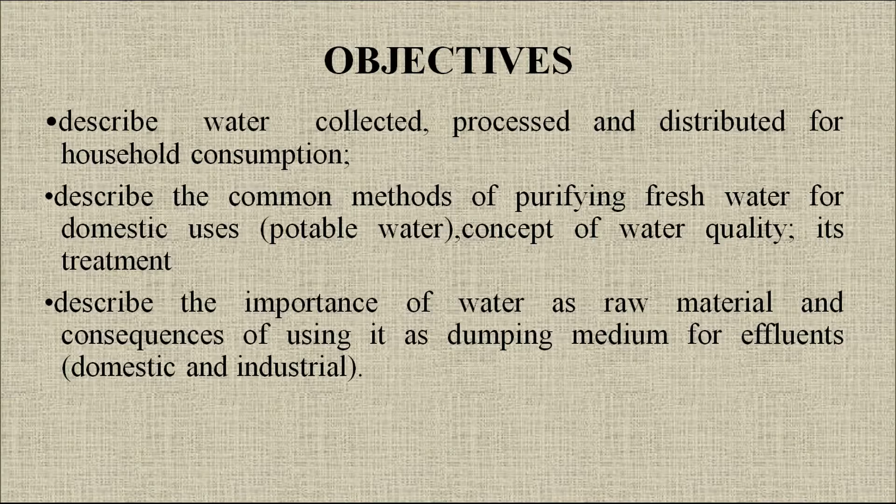The objectives are: describe how water is collected, processed and distributed for household consumption; describe the common methods of purifying fresh water for domestic uses; concept of water quality and its treatment. Lastly, describe the importance of water as a raw material and the consequences of using it as a dumping medium for effluents, both domestic and industrial. So let us define what is fresh water.

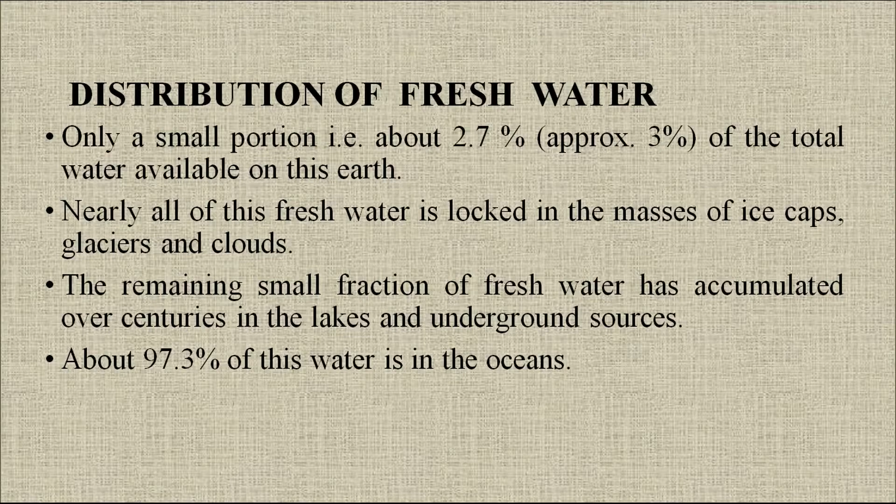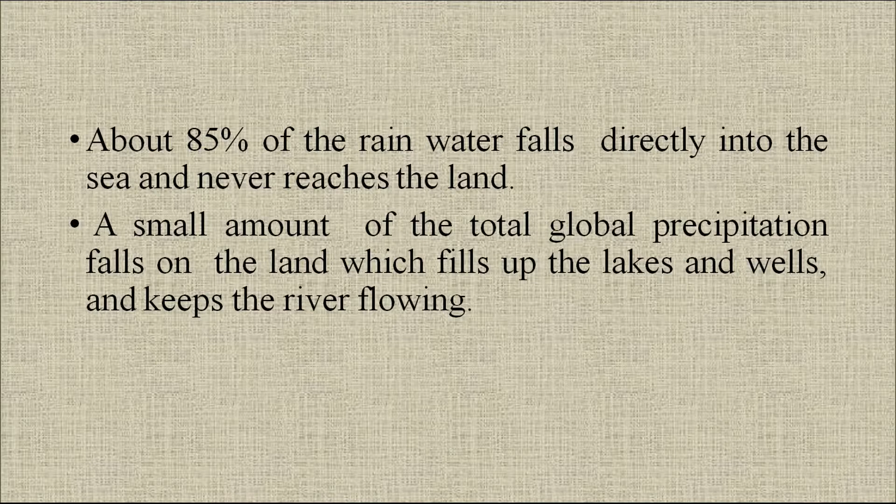Fresh water is water that has no salt and that we can drink. Distribution of fresh water: only a small portion, about 2.7% of the total water, is available on this earth. Nearly all of this fresh water is locked in the masses of ice caps, glaciers and clouds. The remaining small fraction has accumulated over centuries in lakes and underground sources. About 97.3% of this water is in the oceans. About 85% of the rainwater falls directly into the sea and never reaches the land. A small amount of the total global precipitation falls on the land, which fills up the lakes and wells and keeps the rivers flowing.

Out of the 2.7% fresh water, 2.14% lies frozen in the polar regions. Thus, all the water in the lakes and rivers, all the moisture in the atmosphere, soil, vegetation and underground water amounts to about 0.5% of the total. Of this 0.5%, more than 98% is in the form of groundwater, half of which lies more than 1000 meters below the surface, and thus only 0.1% is in the rivers.

Water resource distribution of India: the annual rainfall over India is 1170 mm, which is more than anywhere else in the world for a country of comparable size. From precipitation alone, India receives 4000 billion cubic meters including snowfall. Of this, three-fourths occurs only during the monsoon. A good part of this water is lost through evaporation and plant transpiration, leaving only half of it on the land for use.

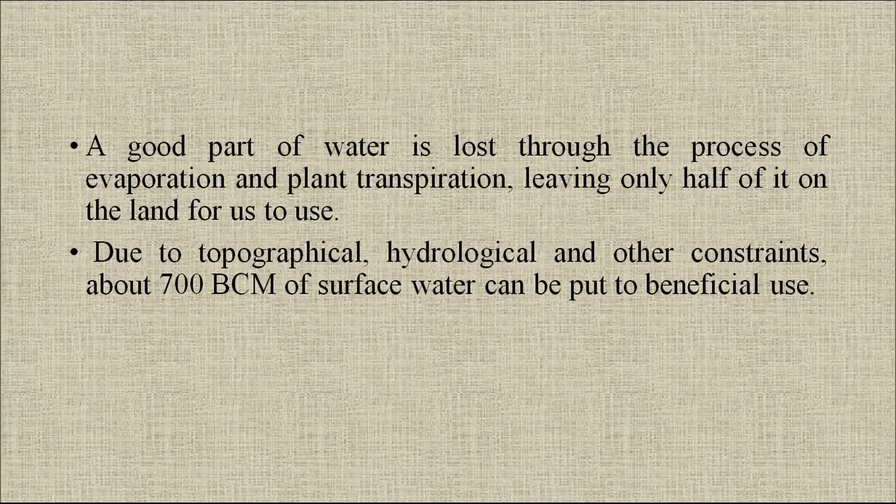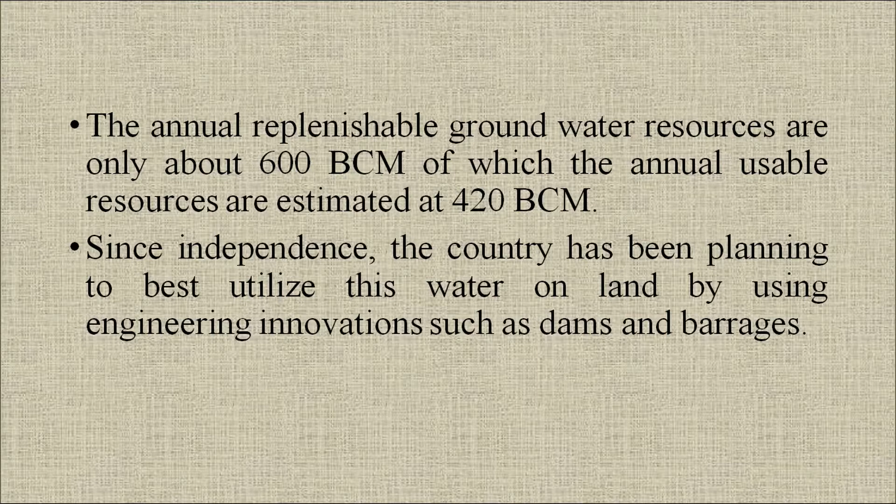Due to topographical, hydrological and other constraints, about 700 BCM of surface water can be put to beneficial use. The annual replenishable groundwater resources are only about 600 billion cubic meters, of which the annual usable resources are estimated at 420 BCM. Since independence, the country has been planning to best utilize this water on land using engineering innovations such as dams and barrages.

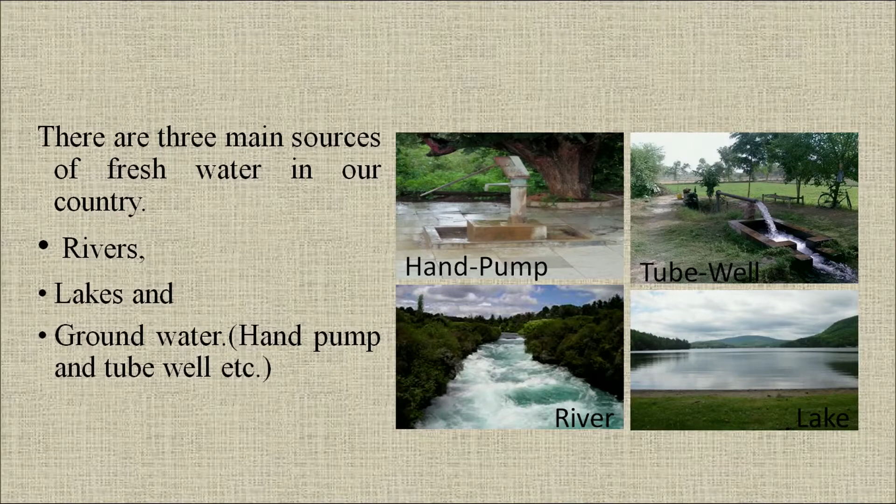There are three main sources of fresh water in our country: rivers, lakes, and groundwater, which we can access through hand pumps or tube wells, as shown in the diagram. Rivers are characterized by unidirectional current with a relatively high average flow ranging from 0.1 to 1 meter per second. The river flow is highly variable with time depending on climatic situation and the drainage pattern. In general, thorough and continuous vertical mixing is achieved in rivers due to prevailing currents and turbulence.

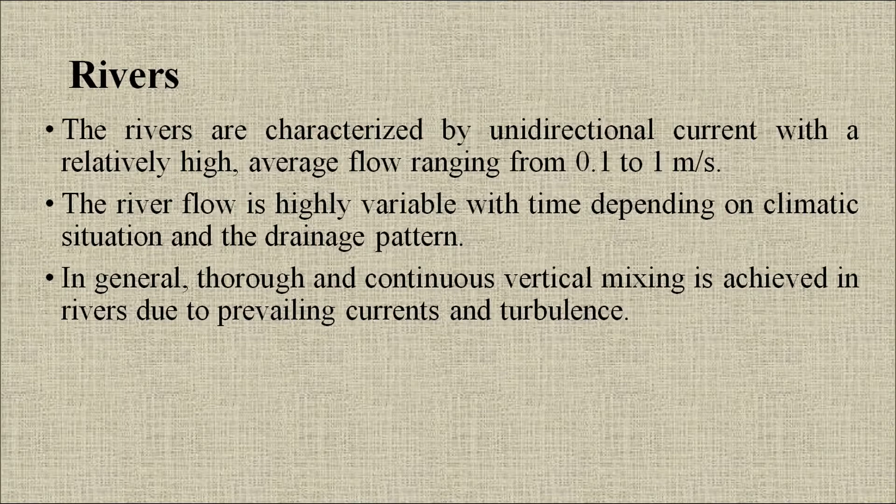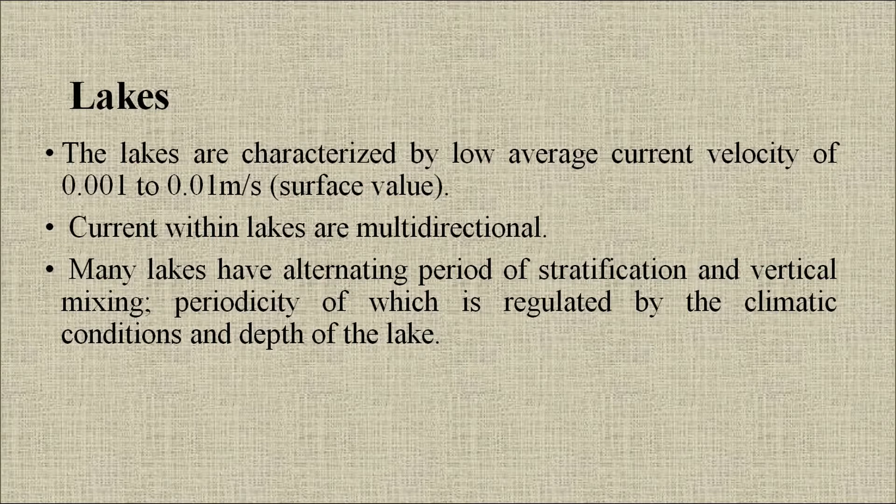Lakes are characterized by low average current velocity of 0.001 to 0.01 meter per second. Currents within lakes are multidirectional. Many lakes have alternating periods of stratification and vertical mixing, the periodicity of which is regulated by climatic conditions and the depth of the lake. Groundwater has a steady flow pattern in terms of direction and velocity. The average flow velocity commonly found in aquifers ranges from 10 to the power minus 10 to 10 to the power minus 3 meters per second, and is largely governed by the porosity and permeability of the geological material. Mixing is rather poor, and depending on local hydrogeological features, groundwater dynamics can be highly diverse.

Water collection: water is collected and distributed for various uses like domestic, industrial, and irrigation. Domestic water is mostly used for drinking, bathing, washing, cleaning, and flushing toilets. Drinking water, also known as potable water, is either directly collected from sources, as in most of our rural areas, or supplied by municipal authorities or the public health department. Surface water generally requires treatment before supply for drinking, as it is often contaminated.

Groundwater is usually free of microbes and suspended solids because of natural filtration as the water moves through soil, though it often contains relatively high concentrations of dissolved minerals from its direct contact with the soil and rock. In large cities, towns, and villages where groundwater is not fit for drinking, surface water is used for drinking.

Cities and towns located along rivers and lakes directly draw water from them and supply it for domestic use after treatment. Large cities like Delhi draw water from multiple sources like Bhakra Reservoir, Upper Ganga Canal, Western Yamuna Canal, and the Yamuna River. The raw water is treated before supply for domestic use.

Now the next section we will read about water treatment. Water in rivers or lakes has to be treated or purified before it is supplied for human consumption. Groundwater also needs treatment to render it potable. It has to be free of harmful microorganisms and chemicals to protect the health of the community.

The water should be crystal clear with almost no turbidity, and it should be free of objectionable color, odor, and taste. For domestic supplies, water should not be corrosive, nor should it deposit troublesome amounts of scale and stains on plumbing fixtures. Industrial requirements may be even more stringent.

Many industries provide special treatment on their own premises. The treatment required to obtain potable water depends on the type and extent of the water source.

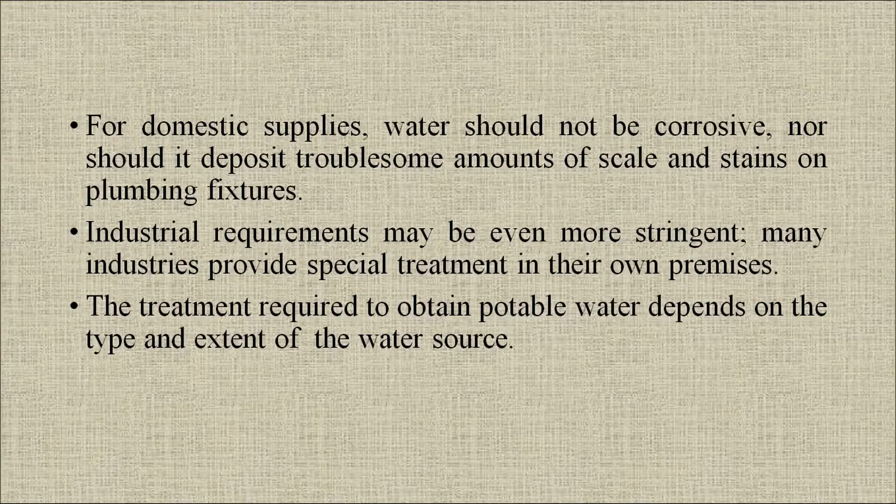Surface water usually needs more extensive treatment than groundwater because most streams, rivers, and lakes are polluted to varying extent. Even in areas far away from human settlement, surface water contains suspended silt, organic material, decaying vegetation, and microbes from animal waste. So this is the water treatment procedure.

Method of water treatment: water is treated by a variety of physical and chemical methods. Treatment of surface water begins with intake screens to prevent fish and debris from entering the treatment plant.

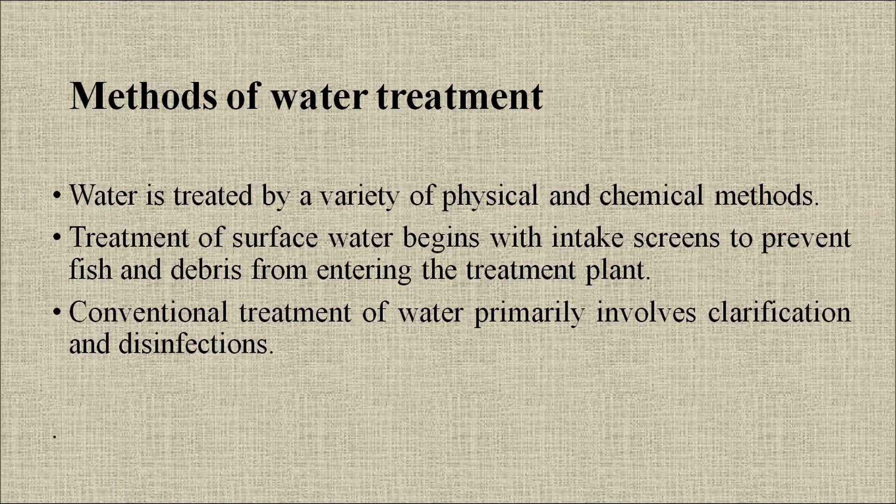Conventional treatment of water primarily involves clarification and disinfection. Clarification removes most of the turbidity, making water crystal clear, and disinfection removes the pathogenic microbes.

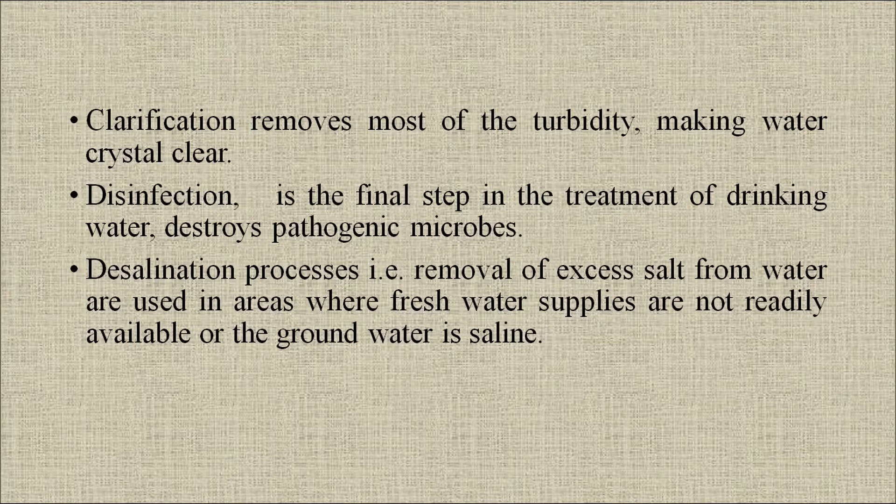Desalination processes remove excess salt from water and are used in areas where fresh water supplies are not readily available or the groundwater is saline.

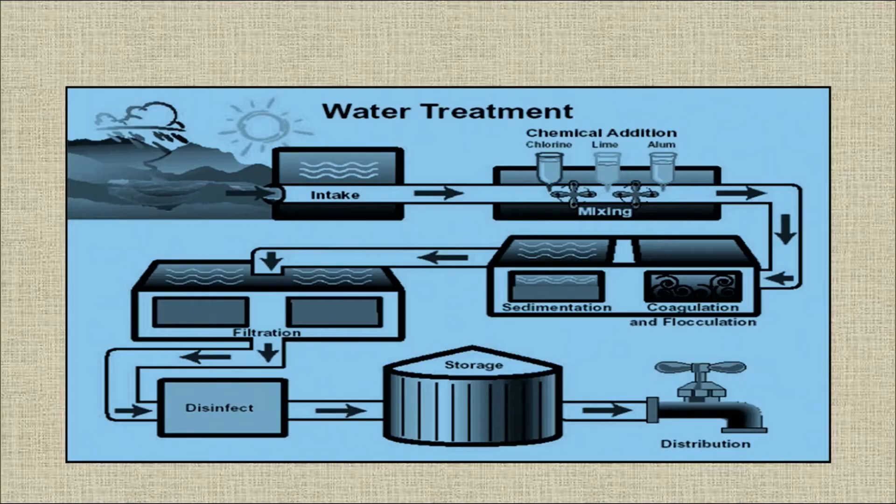Clarification or sedimentation reduces turbidity, and the easiest way to remove it is to let suspended particles settle. It involves various methods like coagulation and flocculation.

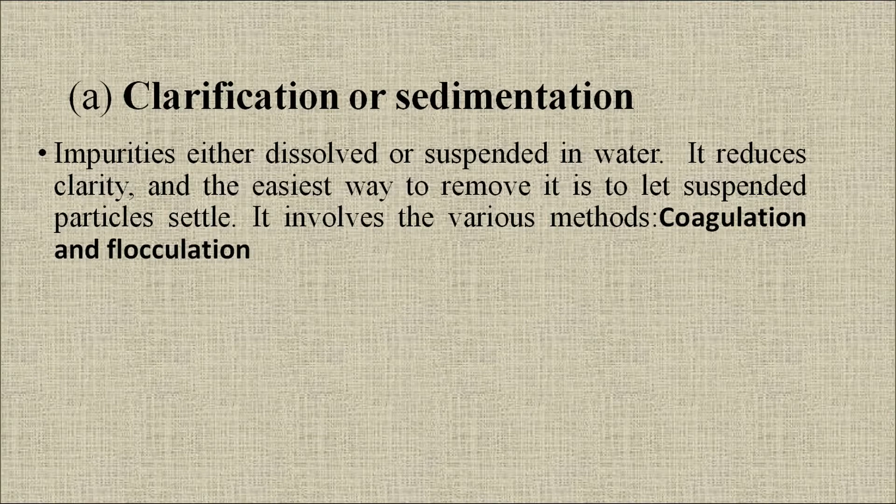Coagulation and flocculation: large, heavy particles settle out readily, but smaller, lighter particles do not settle easily. These light particles are called colloidal particles, and alum is used to remove these particles.

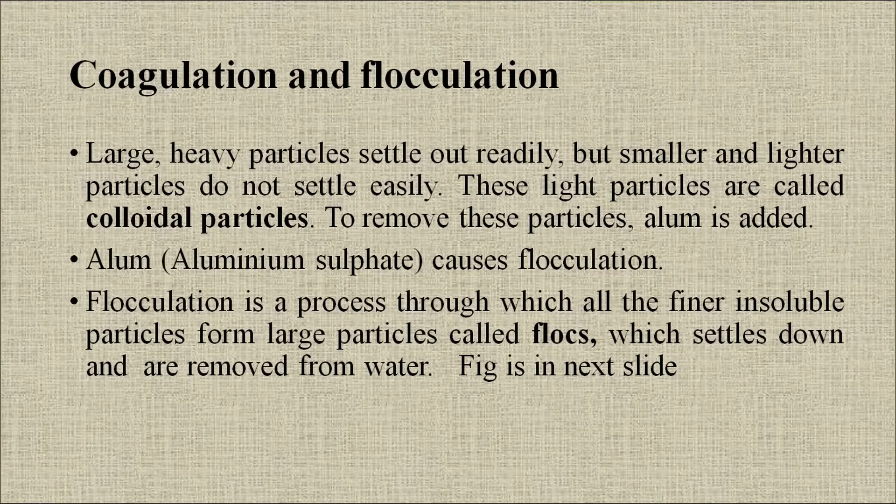Flocculation is a process through which all the finer insoluble particles join to form large particles called flocs, which settle down and are removed from water.

Alum, ferric sulfate, or sodium aluminate are the common coagulants used for water purification. After flocculation, the flocs are allowed to settle in a settling tank. From here, the supernatant is passed through filters, which are sand filters.

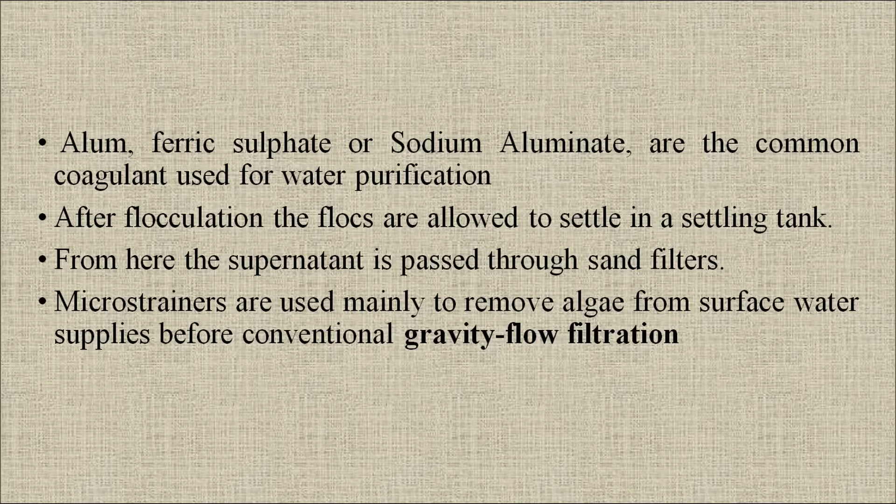Microstrainers are used mainly to remove algae from surface water supplies before conventional gravity flow filtration. So, the process of filtration.

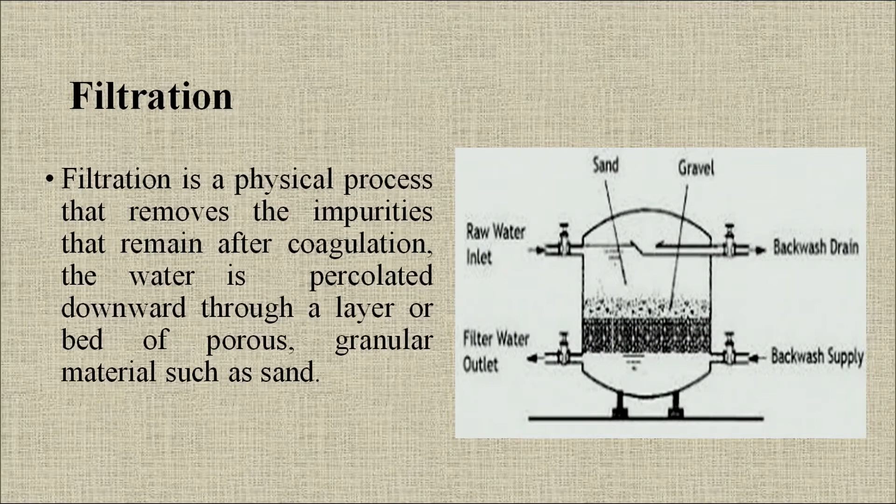Filtration is a physical process that removes the impurities that remain after coagulation. The water is percolated down through a layer or bed of porous granular material such as sand. Suspended particles become trapped within the pore spaces of the filter media, which also removes harmful protozoa and natural color.

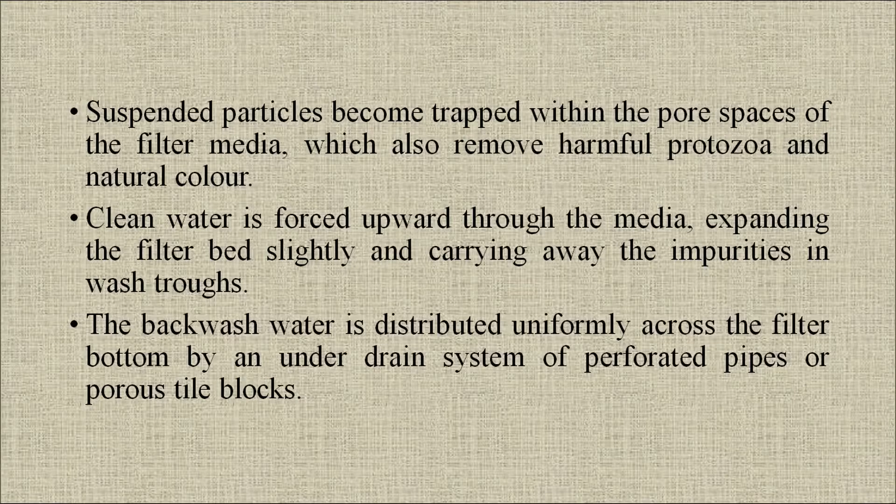Clean water is forced upward through the media, expanding the filter bed slightly and carrying away the impurities in wash troughs. Now, the rapid filter is the most common type of filter used to treat public water supplies.

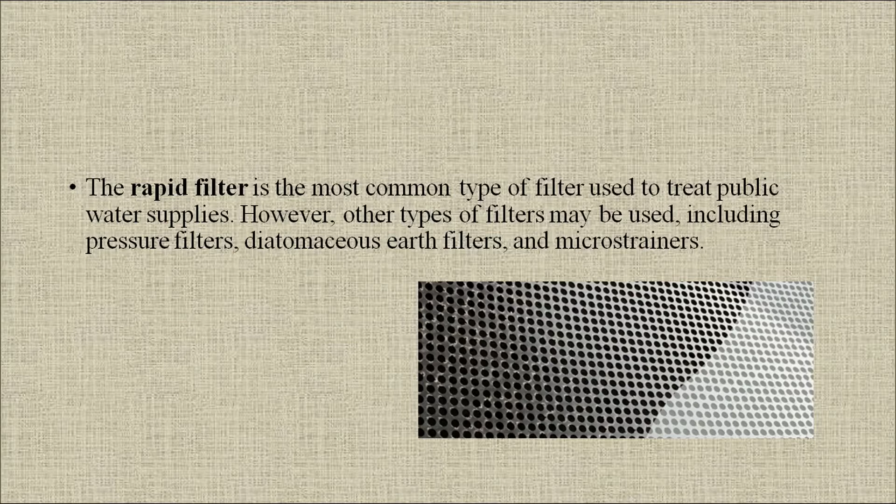Disinfection destroys pathogenic bacteria and is essential to prevent the spread of waterborne diseases. The final process in drinking water treatment is accomplished by applying either chlorine, ozone, or ultraviolet radiation to clarified water.

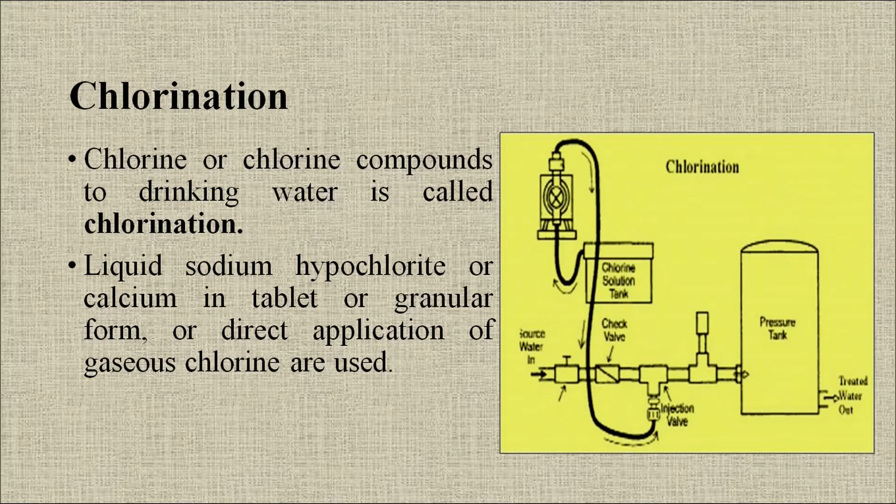So this is the process of chlorination. Chlorine or chlorine compounds are added to the water. Liquid sodium hypochlorite or calcium in tablet or granular form, or direct application of gaseous chlorine, are used.

Then ozone treatment: since ozone is used in gaseous form, it has the advantage of not causing taste or odor problems. It also leaves no residue in the disinfected water. The lack of ozone residue, however, makes it difficult to monitor its continued effectiveness as water flows through the distribution system.

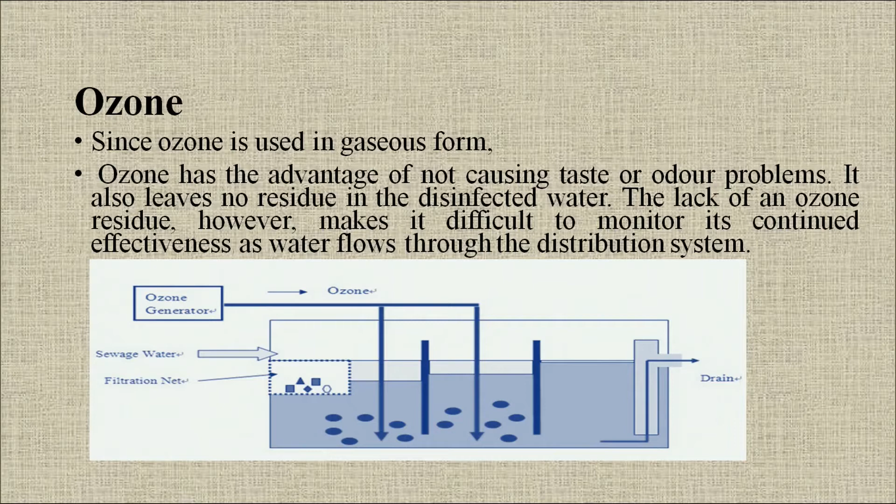Traditional method of water treatment: Sanskrit writings from as early as 2000 BC tell how to purify foul water by boiling and filtering. But it was not until the middle of the 19th century that a direct link between polluted water and disease, commonly cholera, was proved.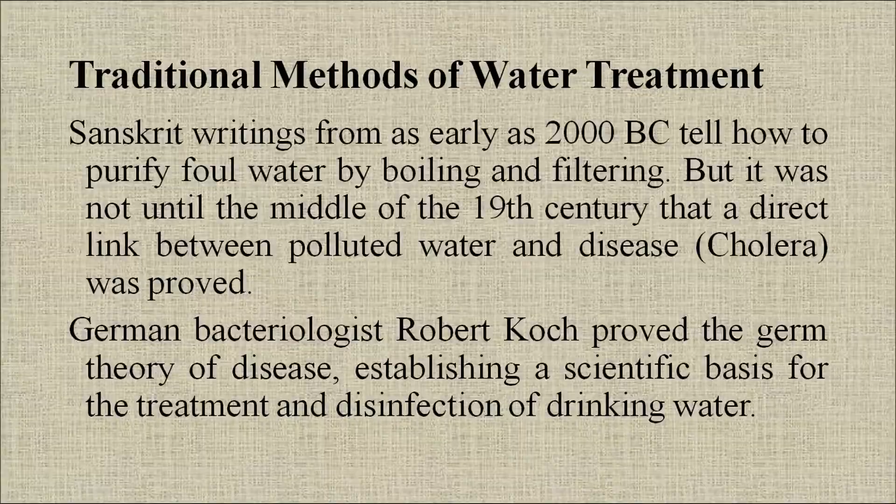German bacteriologist Robert Koch proved the germ theory of disease, establishing a scientific basis for the treatment and disinfection of drinking water. Other methods for water purification are also used, since natural contaminants like fluoride, iron or arsenic are sometimes present in water, which are very harmful to human health.

For fluorine, the Bureau of Indian Standards prescribes 1 milligram per liter as desirable and 1.5 milligram per liter as the maximum permissible limit for drinking water. Water with a high level of fluorine needs to be treated.

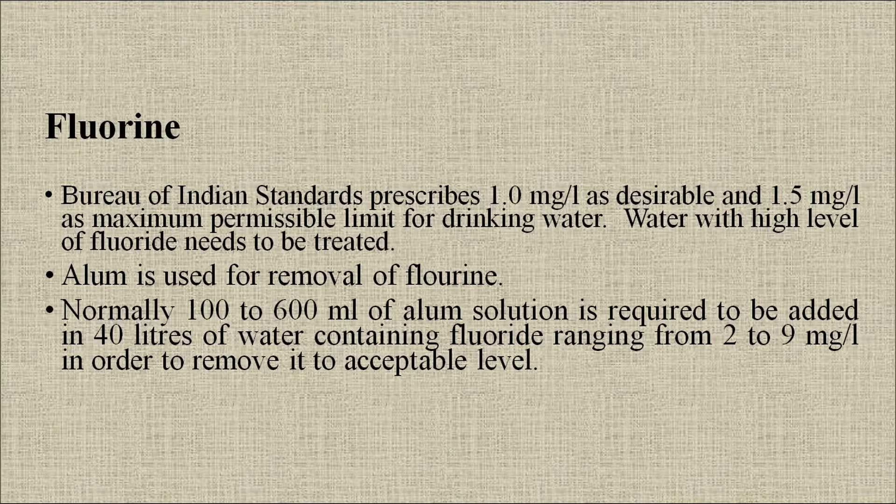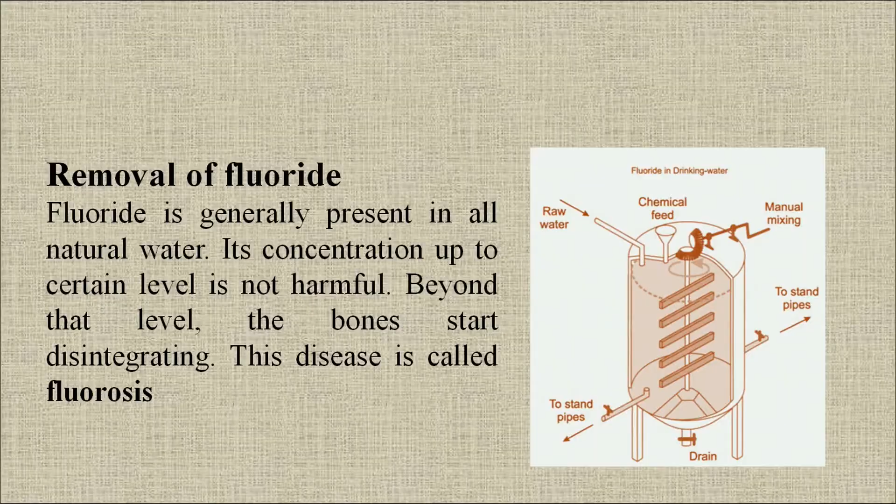Alum is used for fluoride removal, and normally 100 to 600 ml of alum solution is required in 40 liters of water containing fluoride ranging from 2 to 9 mg per liter, in order to remove it to an acceptable level. Fluoride is generally present in all natural water, and its concentration up to a certain level is not harmful. Beyond that level, the bones start disintegrating, and the disease is called fluorosis. This is how fluoride is removed from water.

Defluoridation at community level: the technique used for community water supply is called the Nalgonda technique, which was developed by the National Environmental Engineering Research Institute, Nagpur.

Iron is mostly present in the area of the northeast region. Iron causes bad taste and odor to drinking water. The desirable limit is 0.3 mg per liter, so removal of iron is essential.

Aeration of raw water over a series of coke, marble, and calcite bed, followed by slow sand filtration, is done. No chemical is required for this treatment, and up to 200 liters per hour of water can be treated.

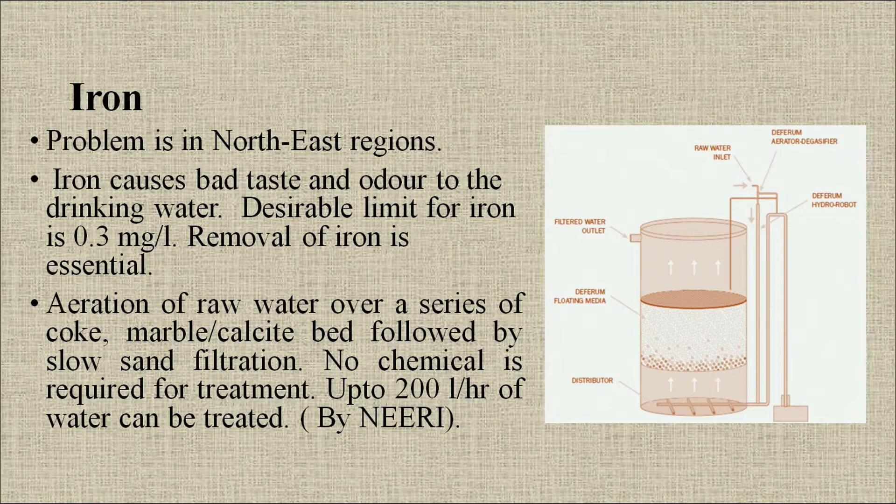At community level, the main parts of the treatment plant are a vertical cylindrical vessel having the following chambers: aeration cum oxidation chamber, settling cum filtration chamber, and a final collection chamber for treated water.

Arsenic is found in groundwater in some parts of West Bengal, which is highly toxic in nature, and the limit for arsenic is 0.05 mg per liter. It is removed from water by oxidation, coagulation, flocculation, sedimentation and filtration. Bleaching powder and alum are used for its removal. Arsenic in water causes a number of skin disorders and even cancer.

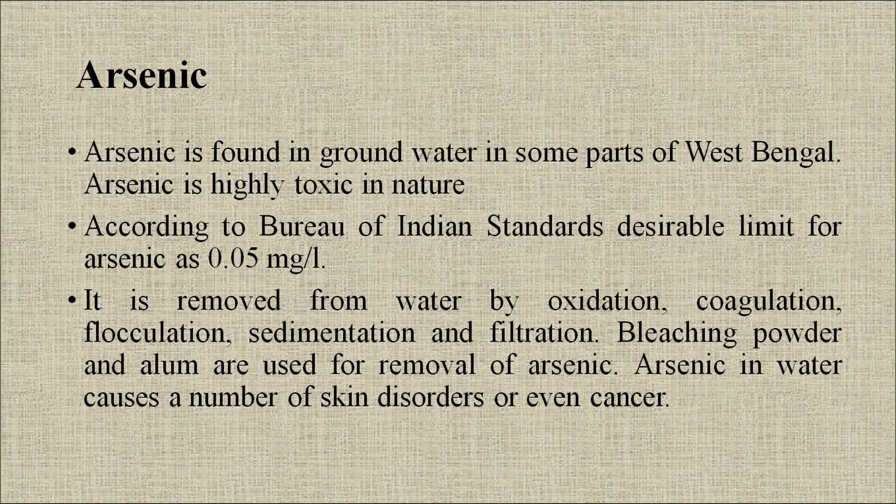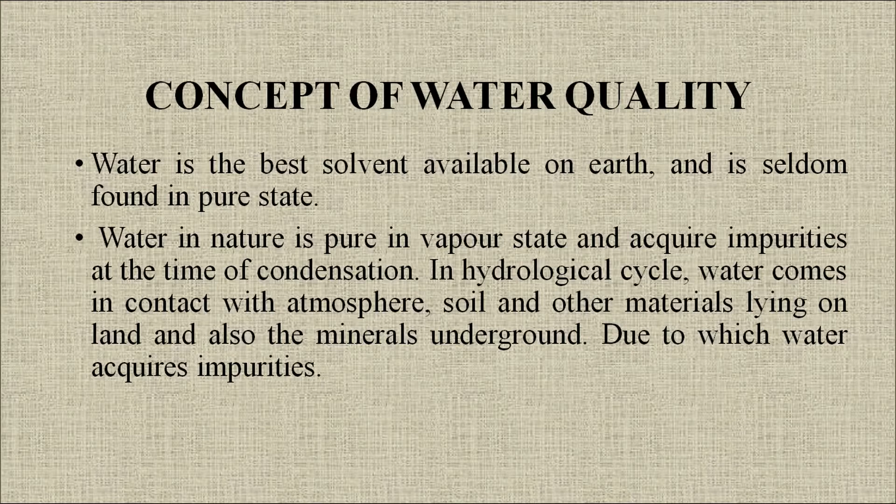Concept of water quality: water is the best solvent available on earth and is seldom found in a pure state. Water in nature is pure in vapor state and acquires impurities at the time of condensation. In the hydrological cycle, water comes in contact with the atmosphere, soil and other materials lying on the land, and also the minerals underground, due to which water acquires its impurities.

Other contaminants and impurities in the form of industrial waste, domestic waste and agriculture chemicals are contributed by human activity. For the sake of human health, the water supply is to be pure, wholesome and potable. Similarly, for agriculture, sensitivity of different crops to dissolved minerals is essential. Textile, paper, brewing and dozens of other industries using water have their specific water quality needs.

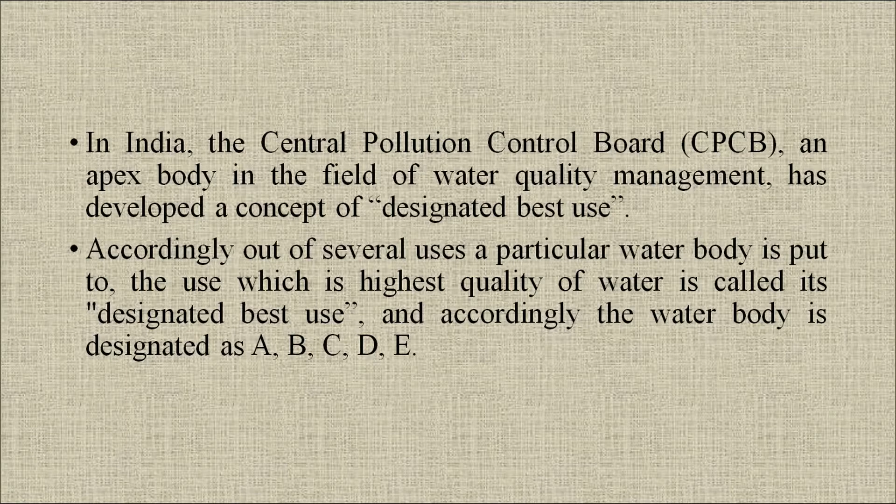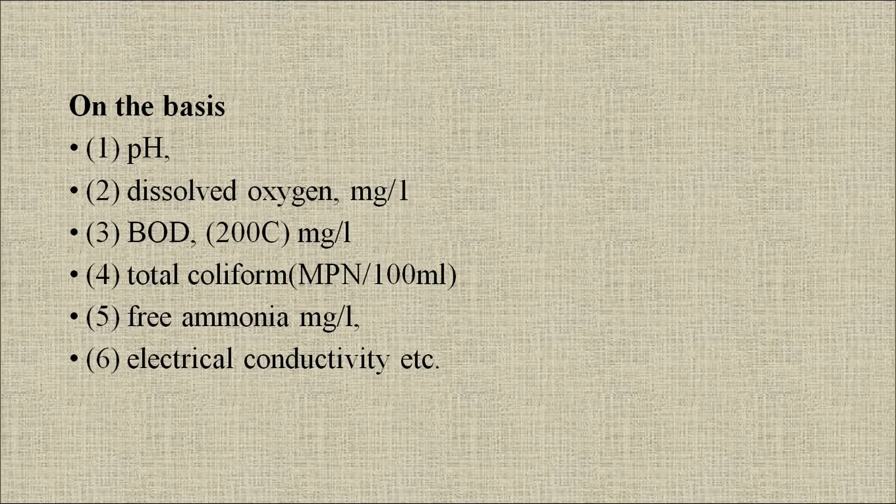In India, the Central Pollution Control Board, or CPCB, an apex body in the field of water quality management, has developed a concept of designated best use. Accordingly, out of the several uses a particular water body is put to, the use which requires the highest quality of water is called its designated best use. The water body is accordingly designated as A, B, C, D or E, on the basis of pH, dissolved oxygen in milligram per liter, BOD, total coliform, free ammonia and electrical conductivity. The next slide gives the classification of surface water in India.

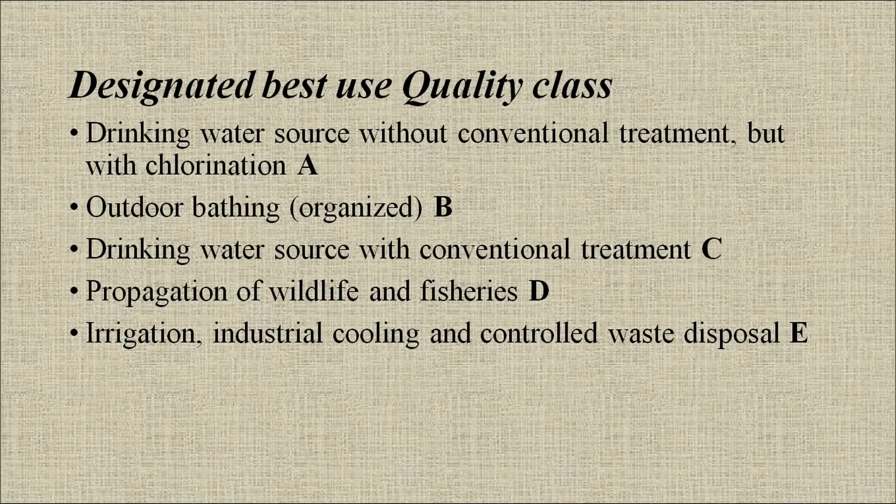Designated best quality classes: drinking water sources without conventional treatment but with chlorination is class A, outdoor bathing is B, drinking water sources with conventional treatment is C, propagation of wildlife and fisheries is D, and irrigation, industrial cooling and controlled waste disposal is E. These are the water quality requirements for different uses.

With industrialization and increasing population, the range of requirements for water has increased. The main uses of water are public supply, outdoor bathing and recreation, fisheries and wildlife propagation, irrigation and other agriculture uses, cooling in power plants, navigation and disposal of waste. Drinking water needs the highest purity of water, whereas disposal of waste can be done with water of any quality.

In recent years, the increasing demand for water has led to the concept of management of water quality throughout the world. This brings us to ecological water requirements.

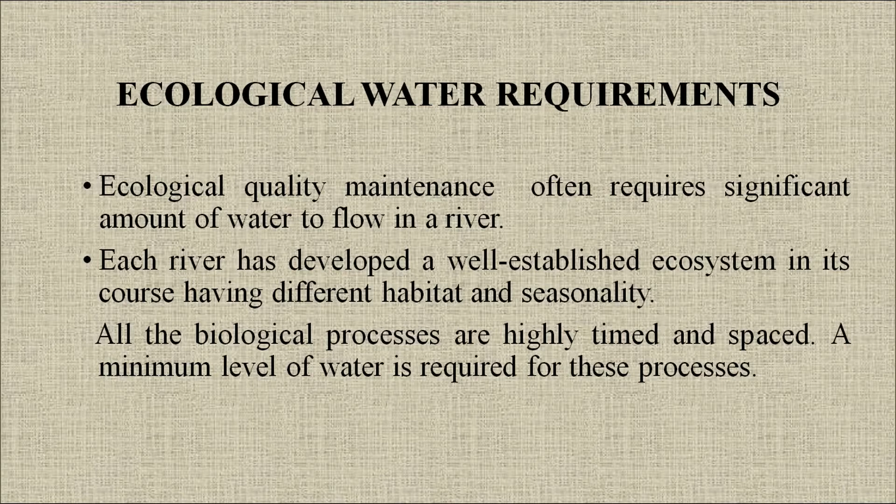Ecological quality maintenance often requires a significant amount of water to flow in a river. Each river has developed a well-established ecosystem in its course, having different habitat and seasonality. All the biological processes are highly timed and spaced, and a minimum level of water is required for these processes.

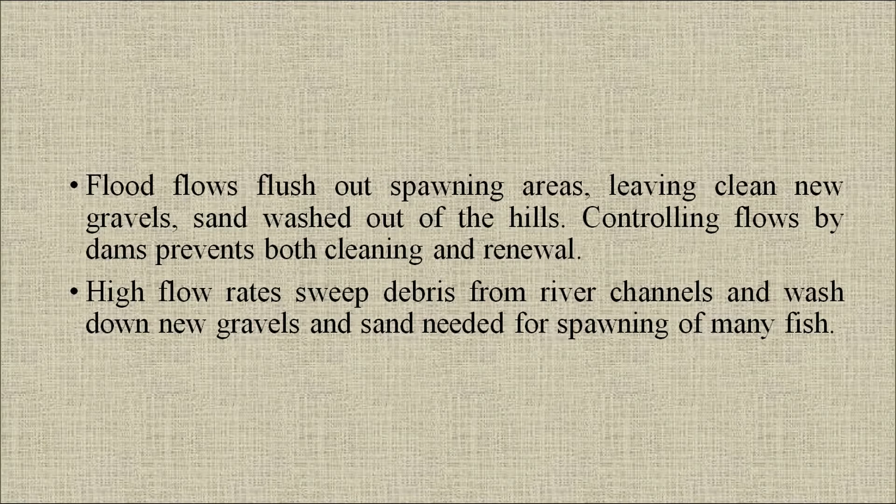Flood flows flush out spawning areas, leaving clean new gravel and sand washed out of the hills. Controlling flows by dams prevents both cleaning and renewal. High flow rates sweep debris from river channels and wash down new gravel and sand needed for spawning of many fishes.

Dilution was considered to be the acceptable solution to pollution and self-purifying capacity of a stream. Minimum National Standards, also called MINAS, notified under the Environment Protection Act of 1986 by the Government of India, also says so.

Dilution plays a great role in protecting health of the river. At least 10 times dilution is available in the stream where the effluent is going to be discharged, because all deleterious material are not removed in waste water treatment. Reduced flow followed by increased waste load have rendered many rivers almost ecologically dead. Thus, special attention is required in water resource planning.

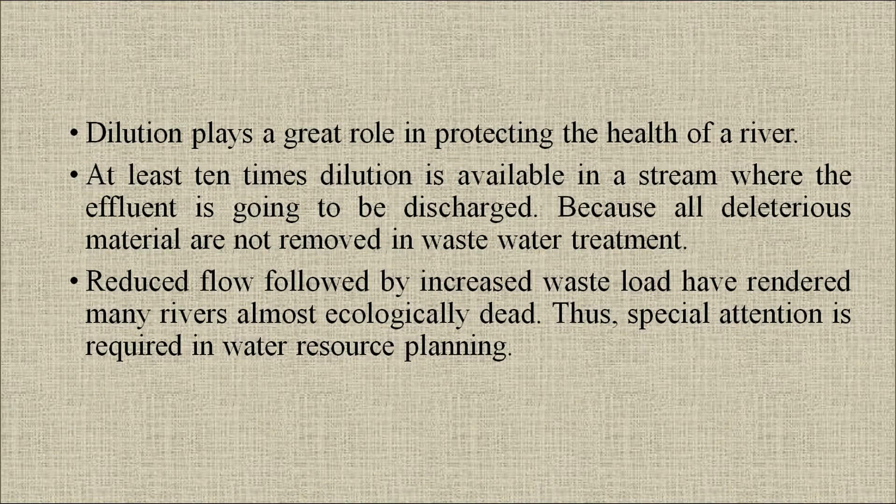Major water quality issues of India: first is water scarcity, due to uneven distribution of rainfall in time and space, and ever increasing demand of water for agricultural, industrial and domestic activities, the water resources are over exploited.

Second is pathogenic pollution. In India, waterborne diseases are the most important water quality issue. The wastewater generated from human settlement is not properly transported and treated before discharging into natural water, which contaminates water surface and groundwater.

Oxygen depletion: a large portion of wastewater is discharged into water resources without any treatment. Such wastewater contains high amount of organic matter. This organic matter, when oxidized in water through microbial activities, consumes dissolved oxygen. Since water has limited availability of oxygen, if consumption exceeds the availability, oxygen depletion results and survival of aquatic life becomes difficult.

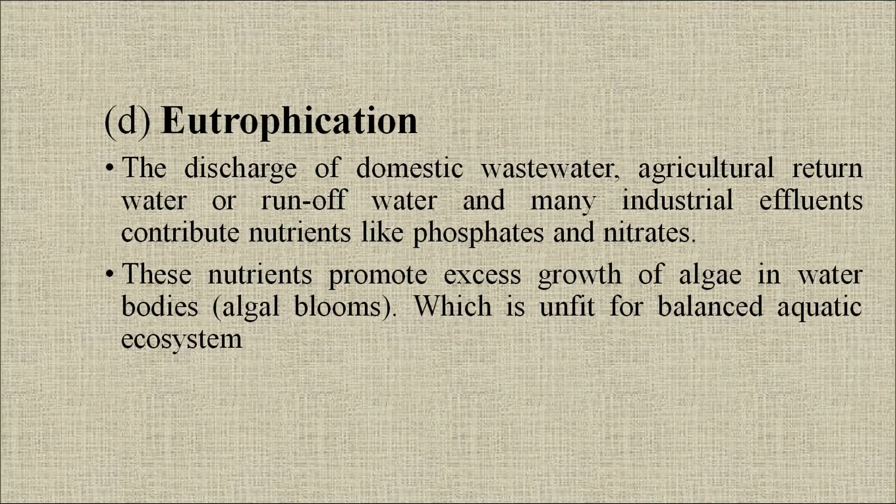Eutrophication: this is the discharge of domestic wastewater, agriculture return water or runoff water and industrial effluents which contribute nutrients like phosphate and nitrates, resulting in the excessive growth of algae or algal blooms.

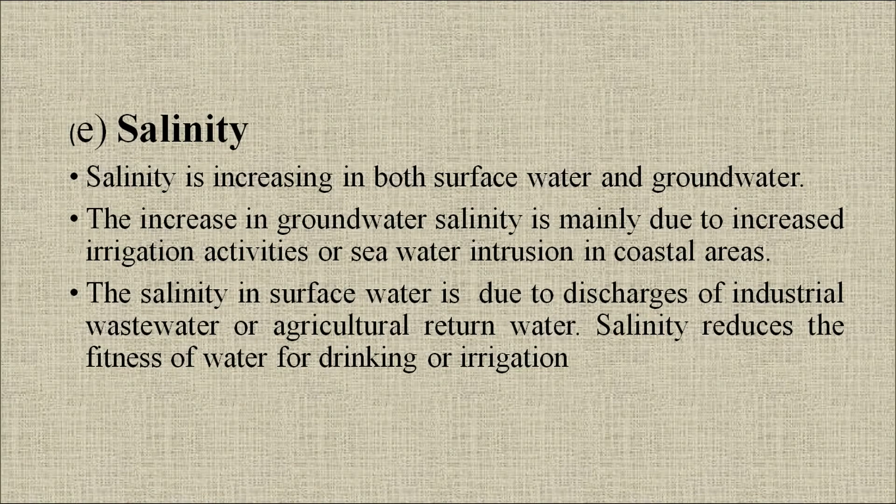Salinity is increasing in both surface and groundwater, and this increase in groundwater salinity is due to increased irrigation activities or seawater intrusion in coastal areas. Toxic pollution, due to the discharge of toxic effluents from many industries and increased use of chemicals in agriculture, many water bodies in the country are polluted.

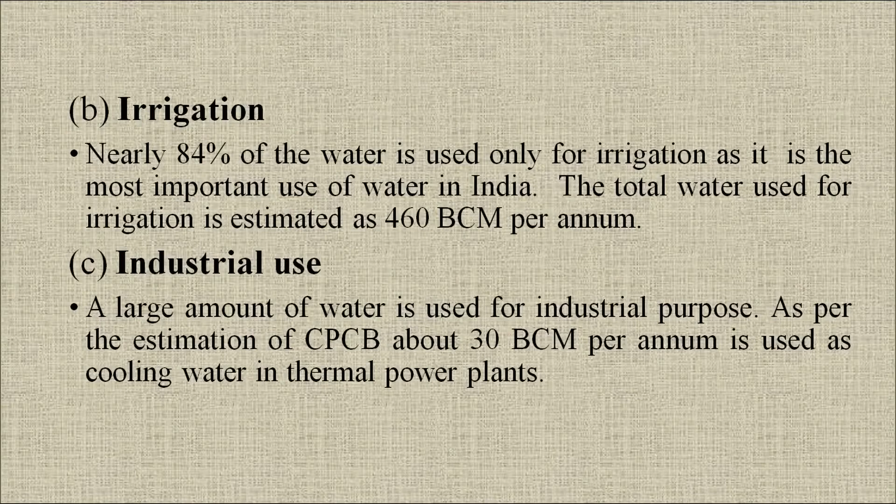The use of water in India is divided into two categories: abstractive use and in-stream use. Abstractive use includes domestic water supply. In India, nearly 85% of the population depends on groundwater as a source of water for domestic use. Then irrigation, 84% of the water is used for irrigation. Industrial use: a large amount of water is used for industrial purpose.

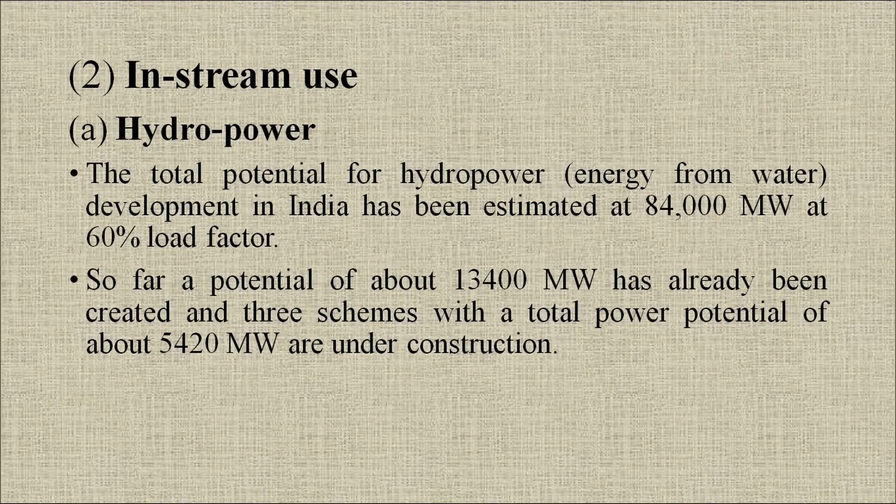In-stream use is like hydropower. The total potential for hydropower development in India is estimated at 84,000 megawatt at 60% load factor. Then fishery: Indian water resources are extensively utilized for fish production throughout the country.

Navigation: at present, the river systems are not fully utilized for navigation. Inland waterways in the public sector are managed by the government-owned Central Inland Water Transport Corporation. Community bathing and washing: the entire surface water sources are being used for bathing and washing. Then cattle bathing and watering.

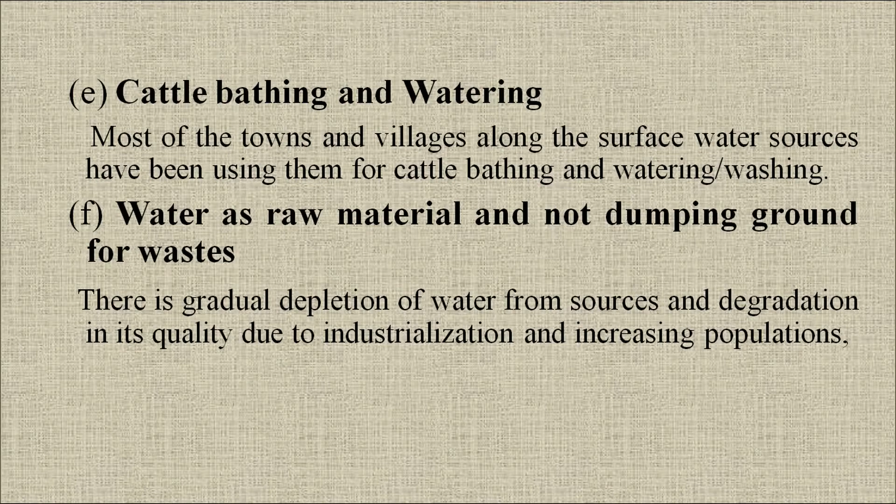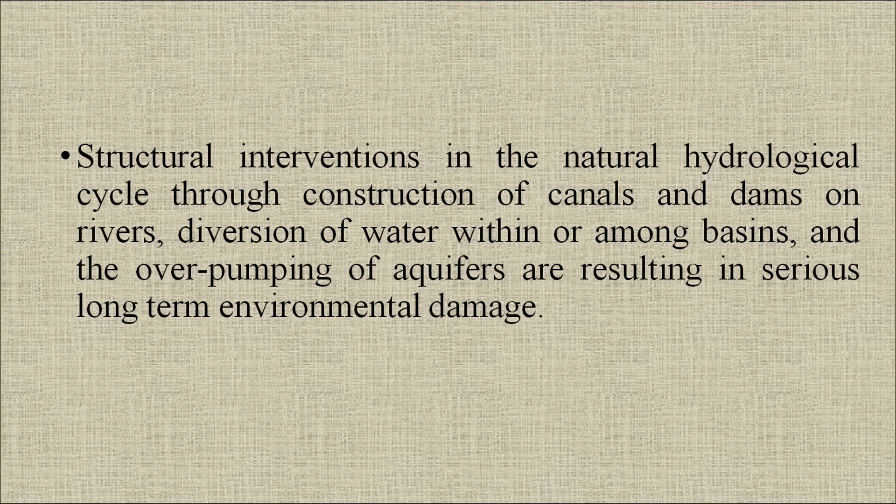Another point is water as a raw material, and not a dumping ground for waste. So there is a gradual depletion of water from sources and degradation in its quality due to industrialization and increasing population. Structural interventions in the natural hydrological cycle through construction of canals and dams on rivers, diversion of water within or among basins, and over pumping of aquifers are resulting in serious long-term environmental damage.

So, before we wrap up, we would like to recap the main points that you have learnt. Fresh water is only a small fraction of total water available on the earth. India receives about 4,000 billion cubic meter of rainwater annually. Fresh water resources are mainly rivers, lakes and groundwater.

For drinking water supply, surface water is treated, whereas groundwater can be used directly with disinfection. The treated water is then supplied through the distribution network in the residential area. For specific pollutants like fluoride, iron or arsenic, specific chemical treatments are given.

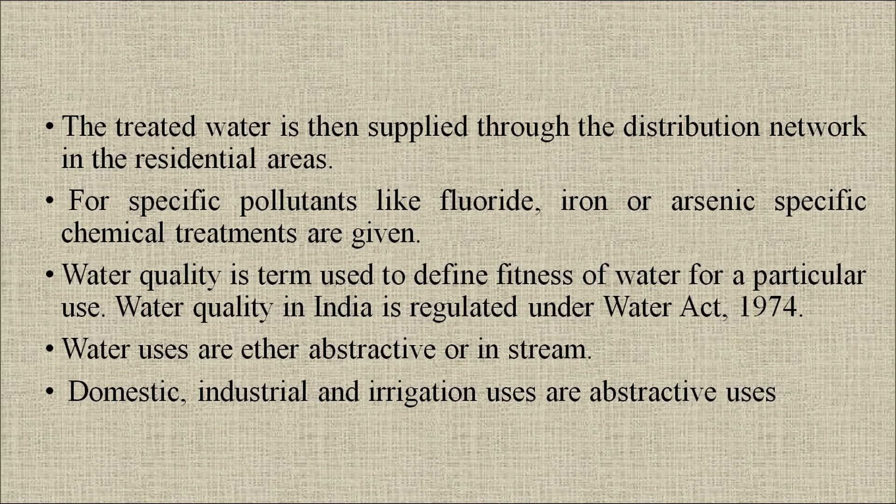Water uses are either abstractive or in-stream. Domestic, industrial and irrigation uses are the abstractive uses, whereas hydropower generation, fisheries, navigation and outdoor bathing are in-stream uses. Pathogenic pollution is the most important form of water pollution in India. A large number of human activities, including agriculture, industrial and urban, have a marked impact on water quality.

So, dear learners, this is all about lesson 29A, freshwater resources.